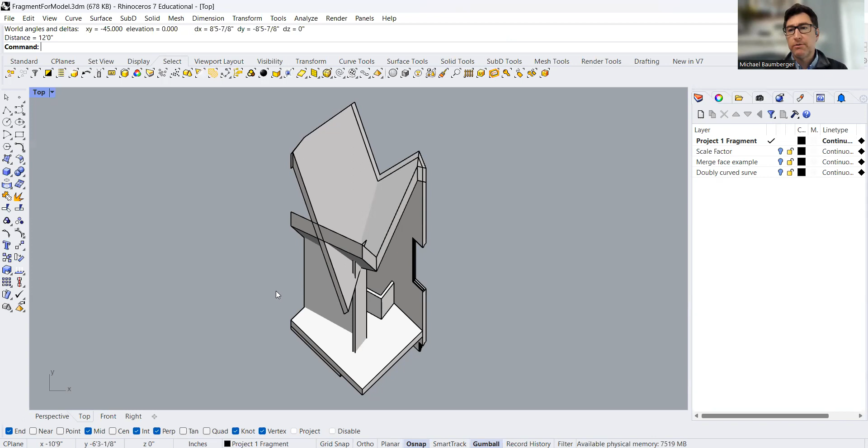Once you have your fragment, you do need to scale this. It's a scale model, right? At half inch equals a foot. To scale specifically to half inch, you want to use the scale command and enter a particular scale factor. For half inch, that scale factor would be 1/24. It's always a factor of 12. So a quarter inch scale is 4 times 12, so it would be 1/48. An 1/8 inch scale would be 1/96, so on and so forth. So for half inch, we'll use a scale factor of 1/24.

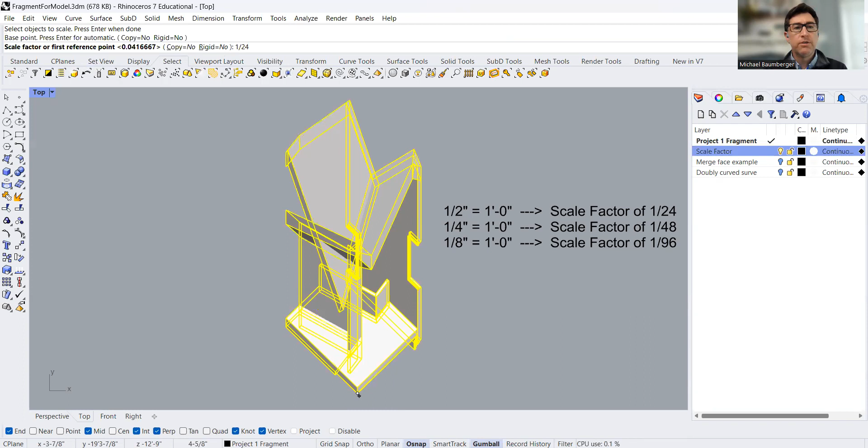So I've already started the scale command. It says select objects, which I have. I hit enter. It's asking for a base point, so I'll just select the corner of the part. And then it's asking for a scale factor or reference point. The scale factor is 1/24. And actually, yeah, there we go. Okay, it's scaled it way down.

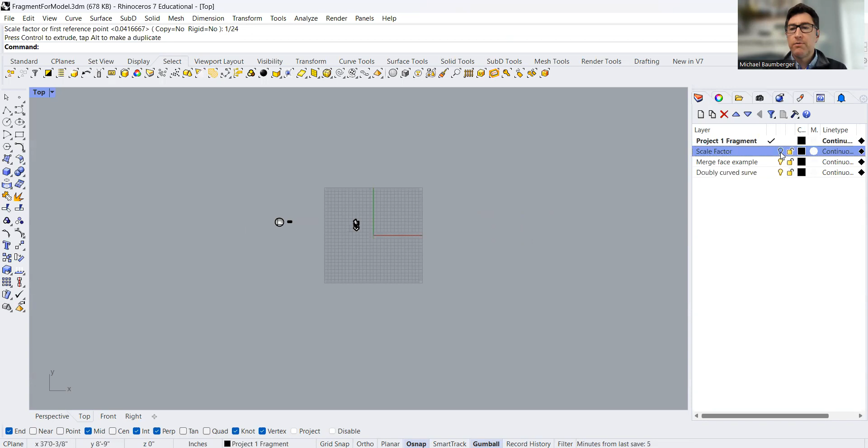I have two other items that I will go ahead and scale as well, so they're all working the same place, and we can move those over there. Okay, so now we have something that is the scale of the model. So now if we get a dimension of this edge, instead of 12 feet, it is 6 inches. So that's perfect.

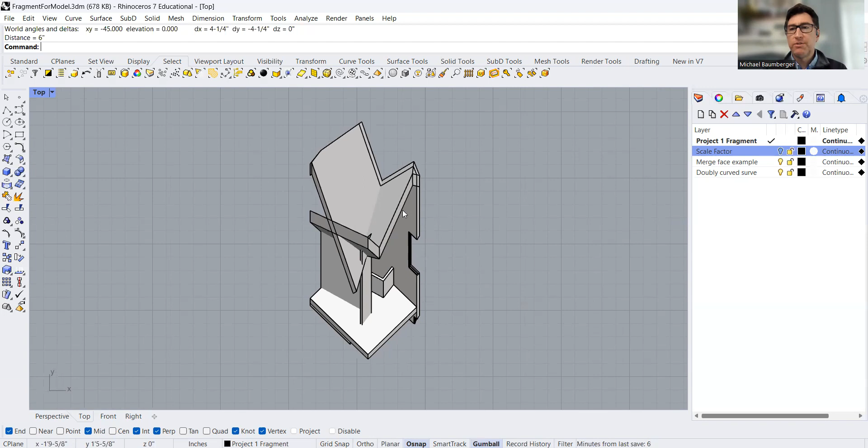Next step is to identify elements or parts within the fragment that you can manageably unroll or otherwise build. In most cases, you won't simply be able to unroll the entire thing in one fell swoop. So in this case, I will grab a small little wall piece over here and extract that from the larger part to start with.

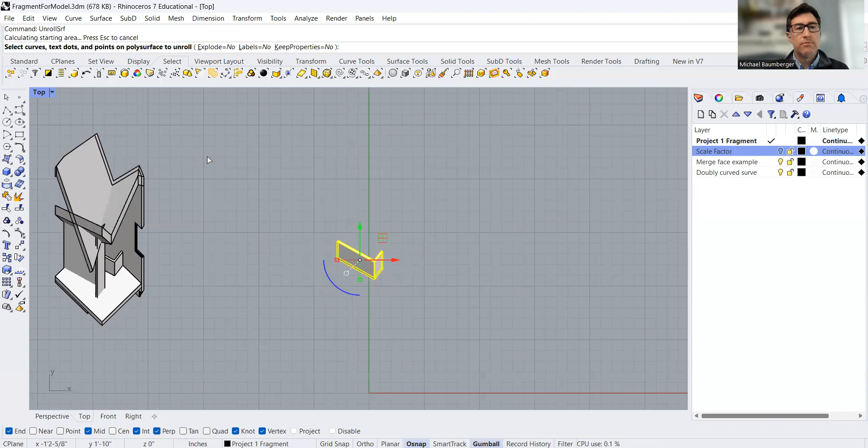And the first thing I'm going to do is just unroll, okay? So using the unroll surface command, select curves, text dots, and points on polysurface to unroll. I'm not going to do that. I do want to draw attention, though, to the first variable, which is explode. Make sure that that's set to no.

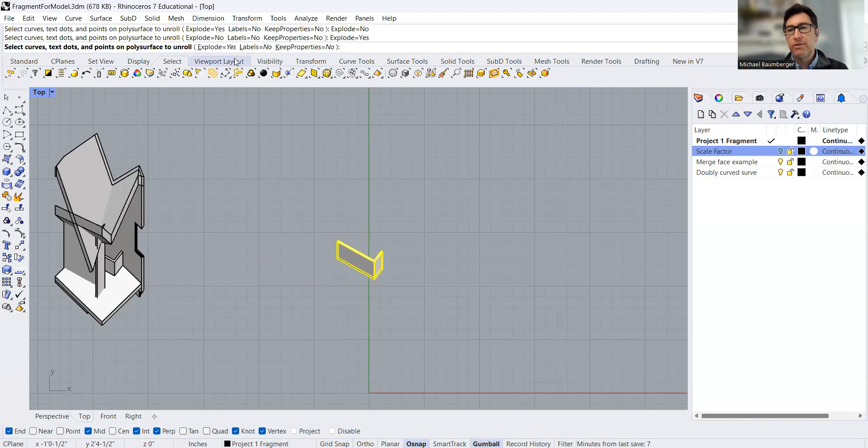Normally, you don't want to explode the unroll. And I'm sure those of you that have started to work with unroll have found that you end up with hundreds of parts. So if I set this to yes and explode, it will do something like this. It's nice and tidy, it unrolls it in a line, but nothing's connected. And it would be maddening in some cases, in a lot of cases it would be more difficult to kind of key each of these back together.

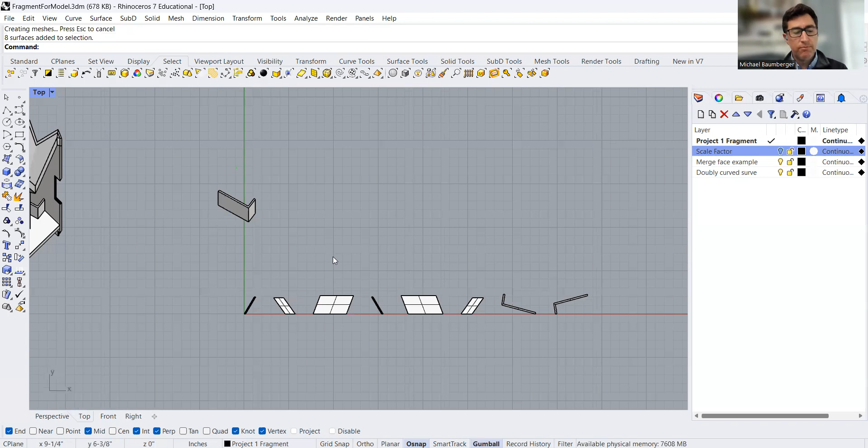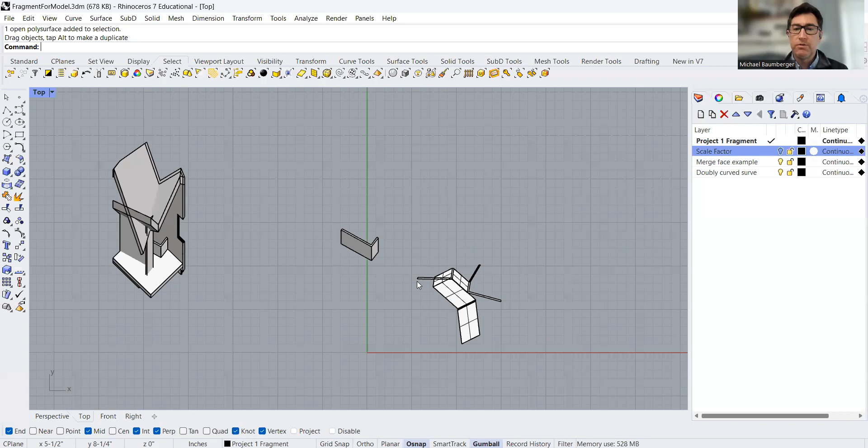Not always, but I would recommend trying to keep the unroll as a contiguous piece. So let's get rid of that. We'll go back, and this time we're going to unroll, and we're going to make sure explode is set to no. And then we end up with this. So the good news is it's a tighter piece, and everything is already registered to one edge, so everything kind of knows where it needs to go.

Already we see a problem, though, because there's at least one surface that is overlapping with another. So that makes this an impossible piece to cut out of a flat sheet. So we're going to have to address that.

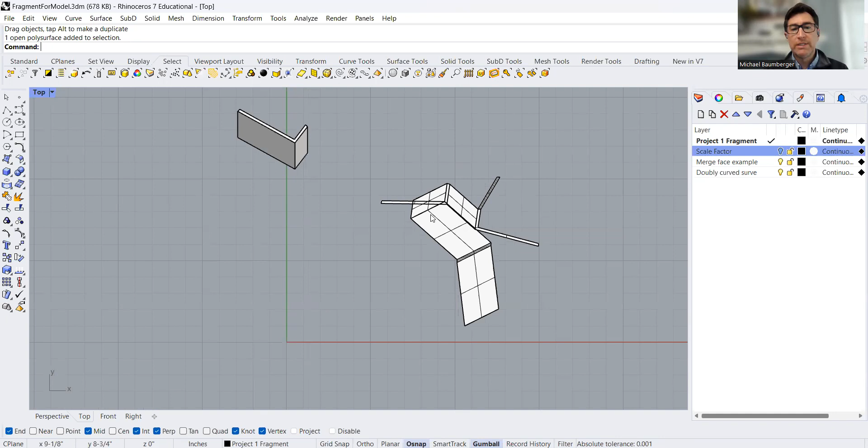Another thing I wanted to point out, one thing that will help you read these more easily is to make sure that the ISO curves are off. So you can just select any part, and then under properties, you can look under ISO curve density and turn off the ISO curves, so then it'll show us just the faces.

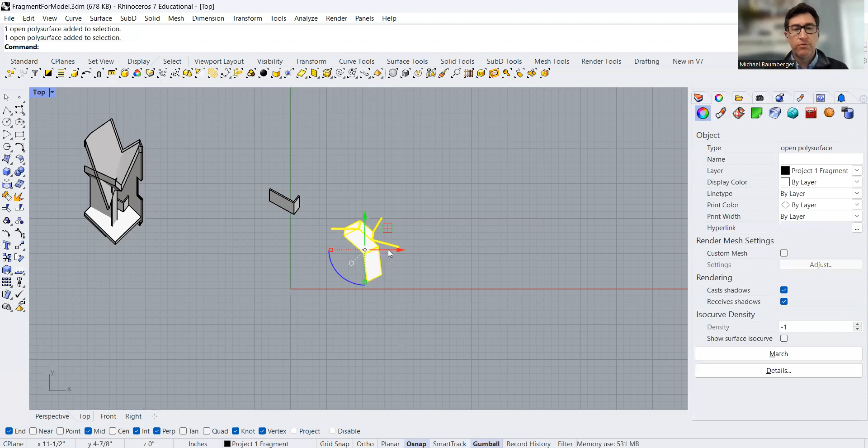But regardless, this is a problem. So let's just move this over to the side for now. So how do we address this? You have a number of options.

You could remove surfaces that maybe won't be visible in the model, remove surfaces that you don't need, right? Even though they're part of the geometry, they may not need to exist in the physical model. They may make more sense to be cut separately.

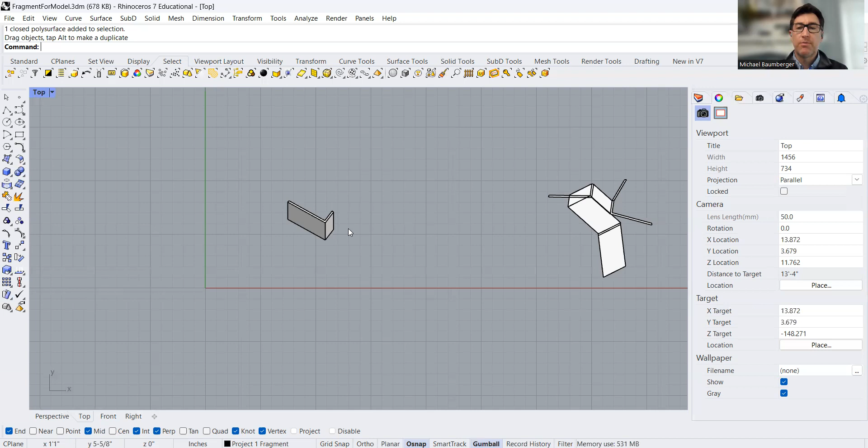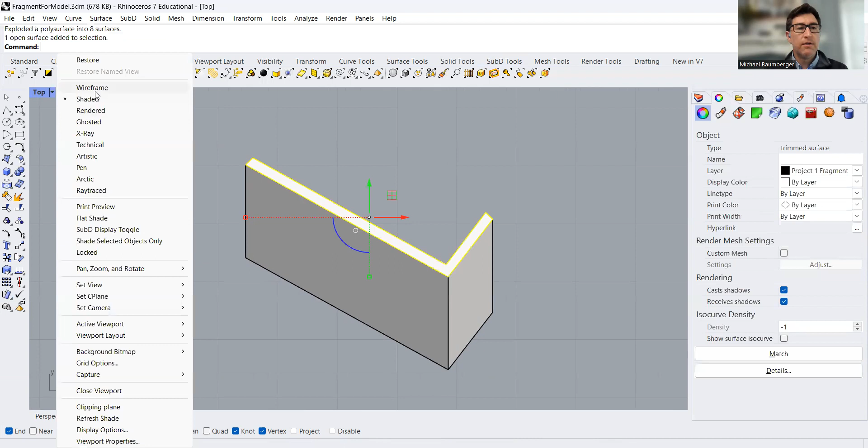So in the case of this, one way to get around this is to explode the part, right? So first thing I'm going to do is explode, and then I am going to select the top surface and the bottom surface. I'm just going to turn on wireframe to get a better view of that, and I'll move them out of the way. Okay, I'll turn shaded back on.

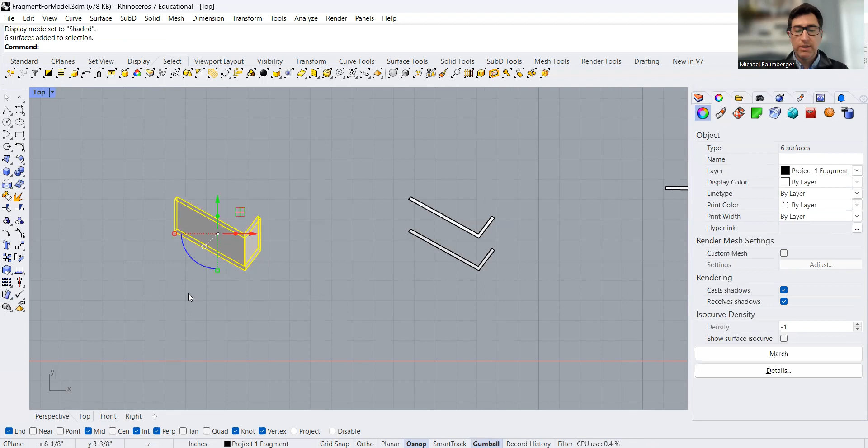So we can address these separately. Now we have, in some ways, a more straightforward geometry. I'll reselect it and type join. So now they're joined together.

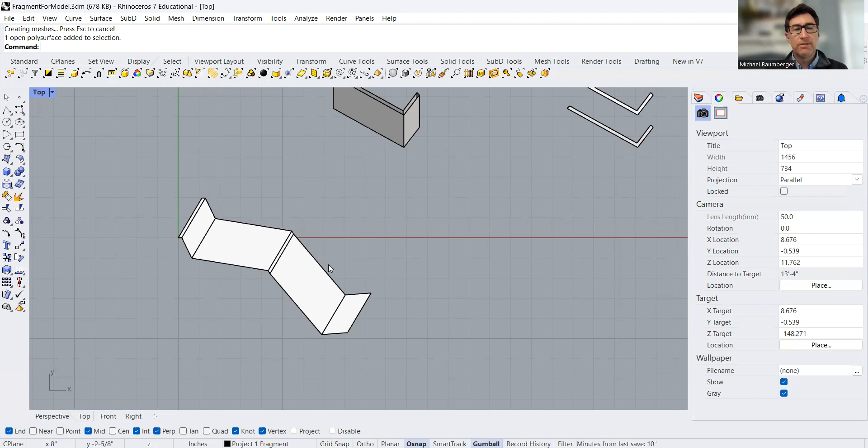Now, when I go to unroll this surface, I end up with something that is much more manageable. In fact, it is possible, right? I can actually lay this out in a way that it could be cut and reassembled.

And these, you know, aside from not being in the correct orientation, these are pretty easily cut as is. In fact, if this is a plan oblique, they are actually already oriented parallel to the XY plane. So you could just move those to 0 and cut those as well. Then you have your piece.

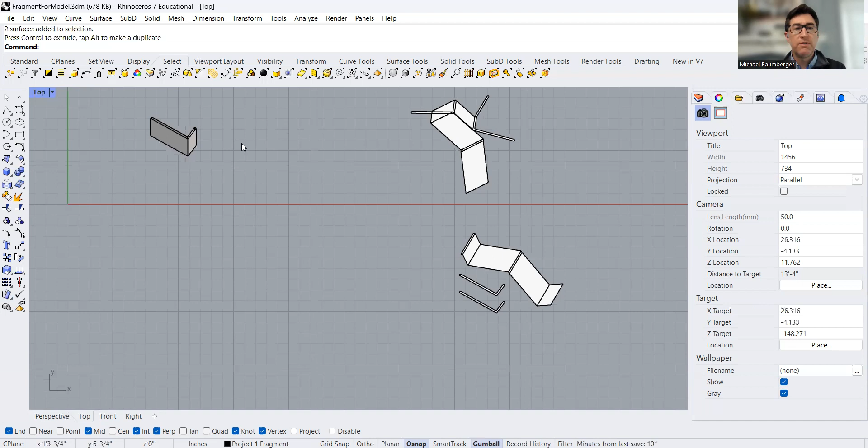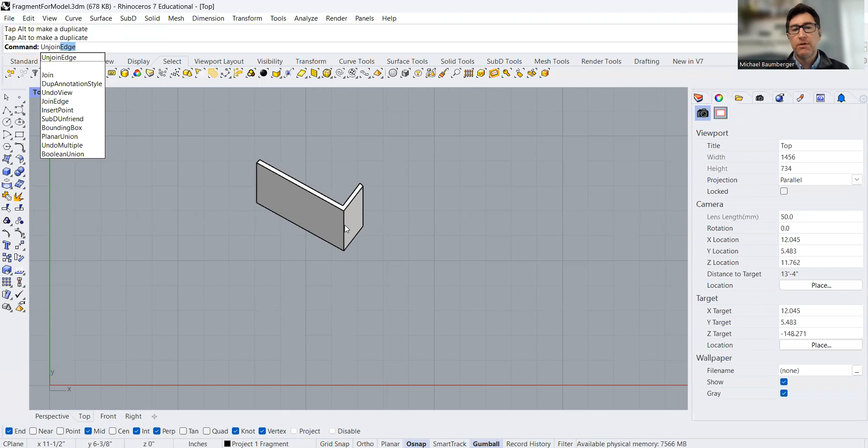Yet another option is a little more involved. Let me grab another copy of the piece. This is an interesting tool called unjoin edge. In this case, we're going to be selective about which edges don't stay attached during the unroll, allowing you to customize to a certain extent how the piece unrolls. You do this simply by running the command and selecting the edges that you don't want connected.

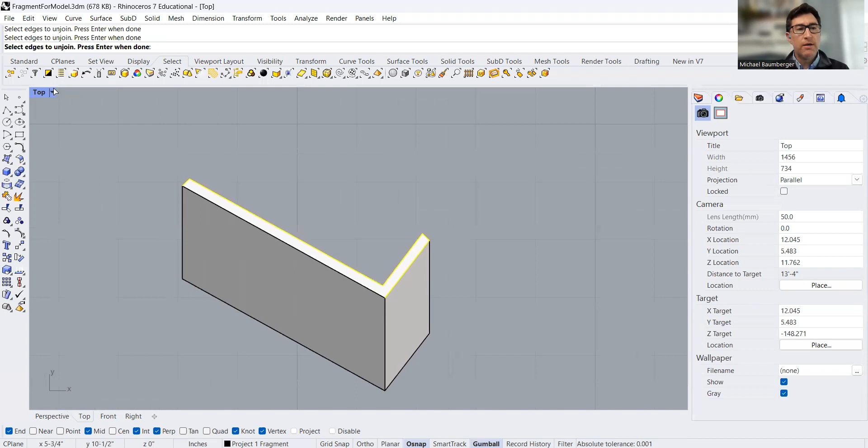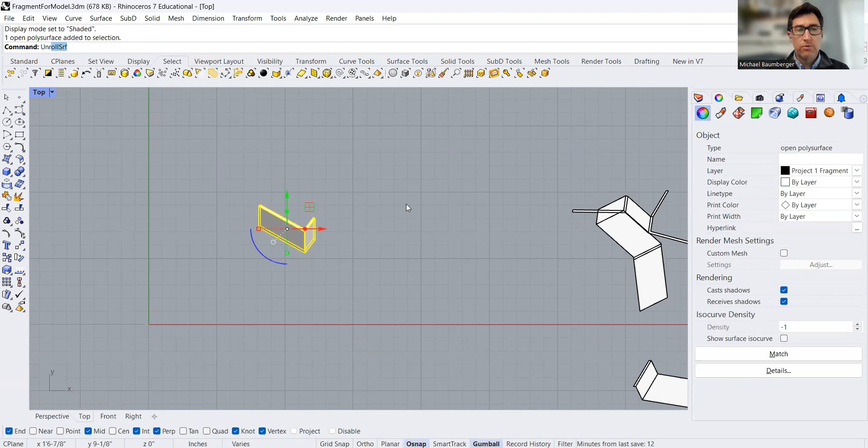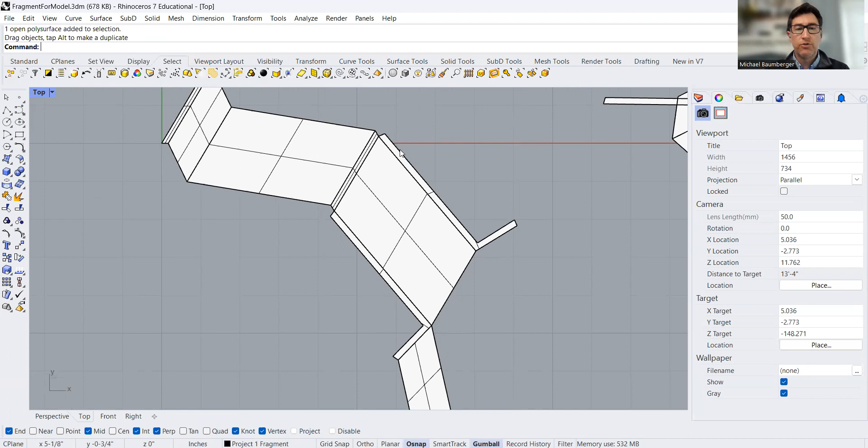One way to do this is to select all but one edge of the top face. We can set this to wireframe and do the same for the series of edges on the bottom surface. You can't see anything different, but when we move back to our unroll command, we get a different result. Compare it to what we had before, which was a mess. I detached the edges on all but one edge of the top and bottom face so that I had control over where that unroll happened. Manageable on the left, not so manageable on the right.

So again, that command is UnjoinEdge, and I think that'll be a useful tool for you guys to use in working through this.

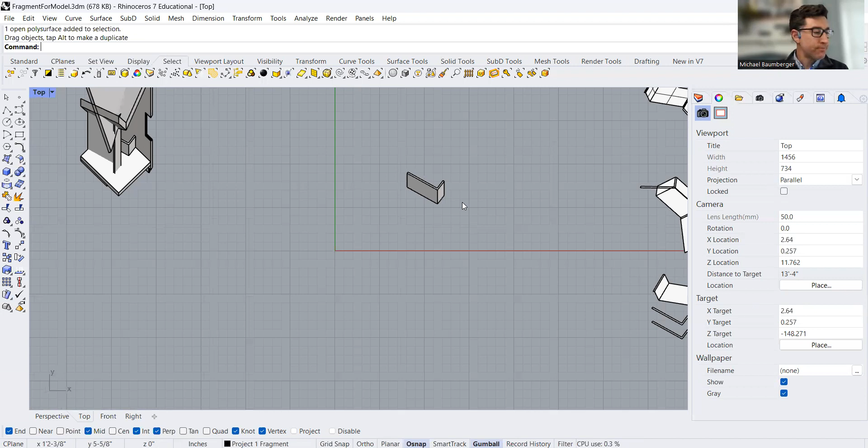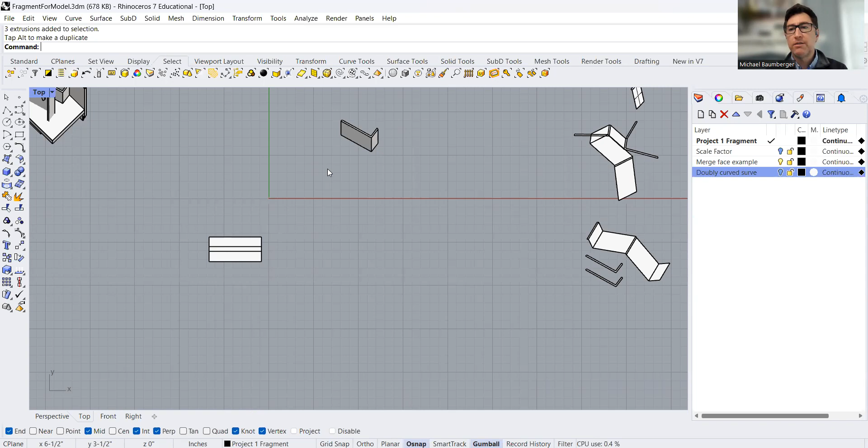Another thing that came up in some questions I've had already is situations where, when you were modeling your fragment, you maybe didn't have physically modeling it in mind, so there were objects stacked against objects, stacked against objects. Let's look at this as an example, kind of a stair element perhaps.

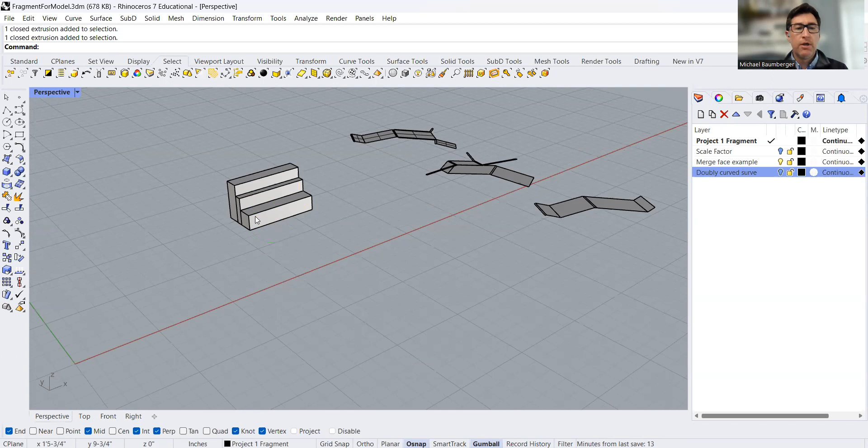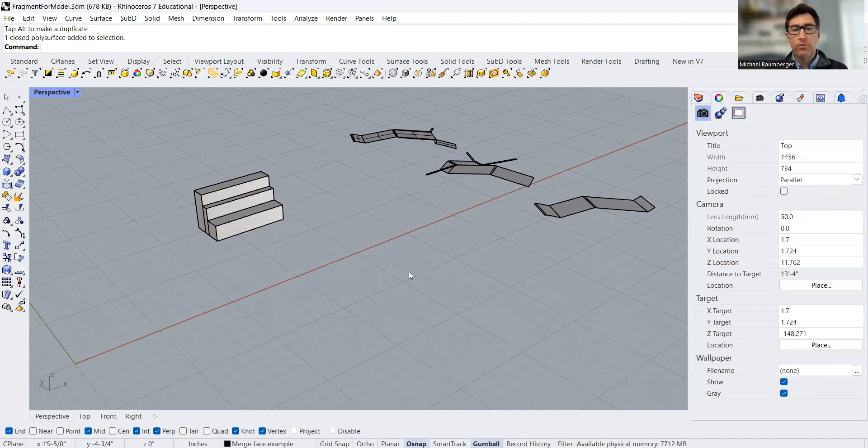Now this is actually three different objects currently, and of course you could unroll them individually, but it often makes sense to join them together. In this case, because they're all solids, I will use the Boolean union command. Now they are one, simple enough. However, when we go to unroll, we end up with this kind of piece, and it's sort of hard to follow what's going on.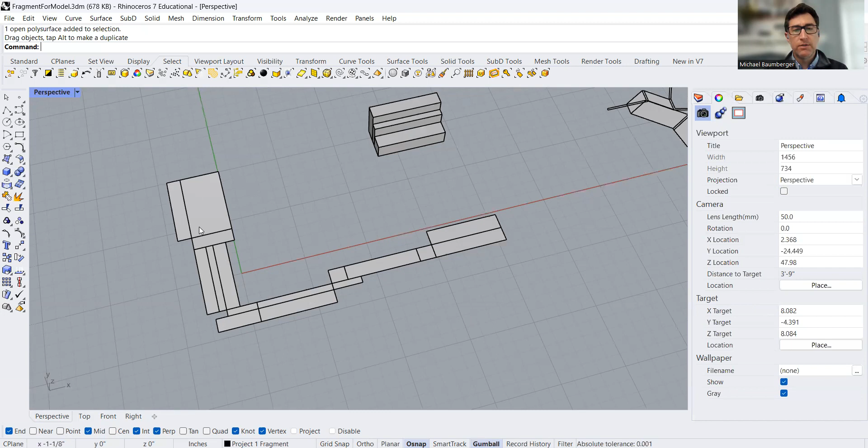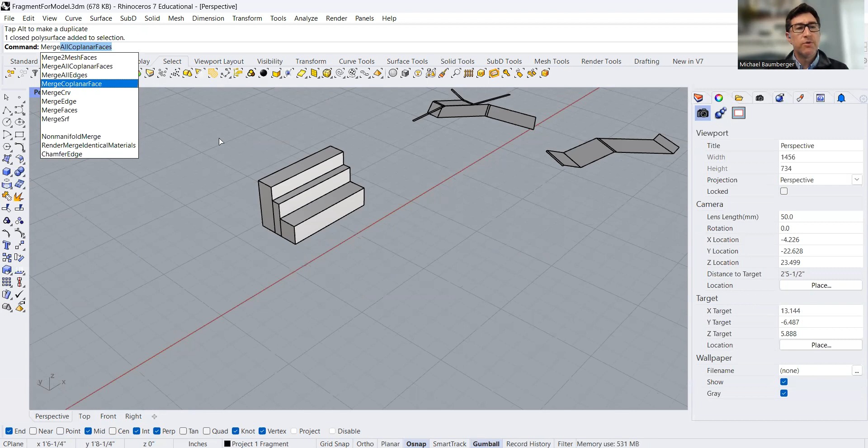In fact, it treats each individual face as a surface, so it gets a little confused. What I would recommend is using a tool called merge coplanar faces. There's merge all, and there's just merge coplanar face. If we select merge coplanar face, I can select a face and an adjacent face that is in the same plane, and it will merge them.

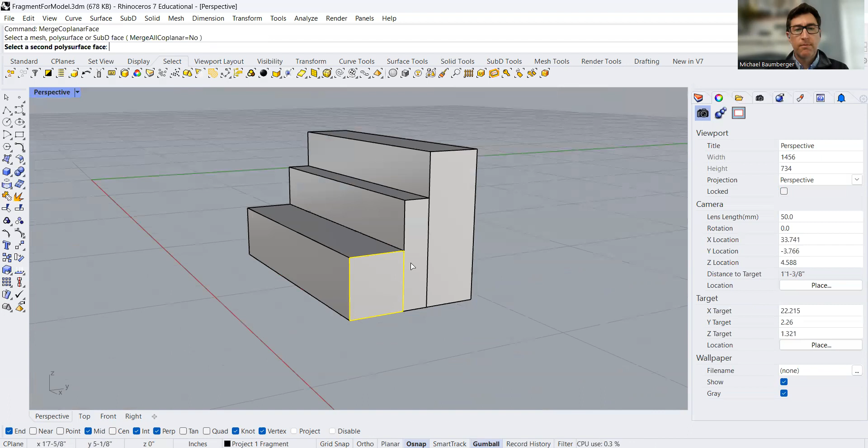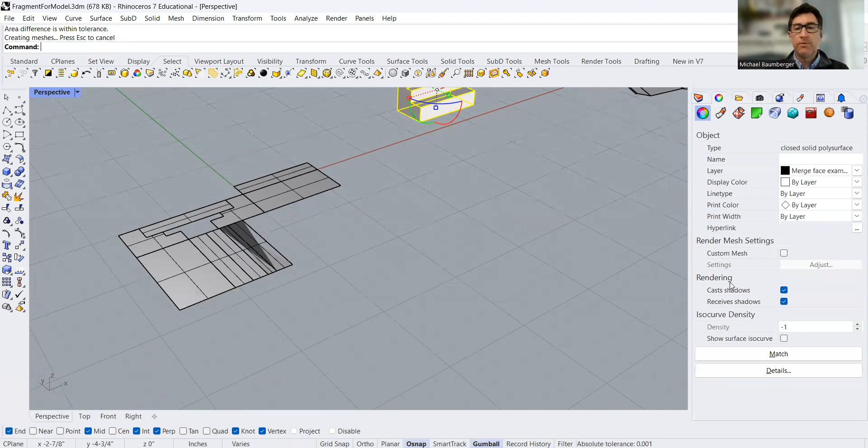And you can continue to do that, just keep going around. Now suddenly this is a much cleaner model, certainly a cleaner model to unroll. So now, again, we go back to unroll, and we end up with something like this when I turn off the iso curves. In particular, you can see the profile of that stair piece.

So another useful tool when you're working on moving your existing models to a place where they're more easily unrolled, more easily built.

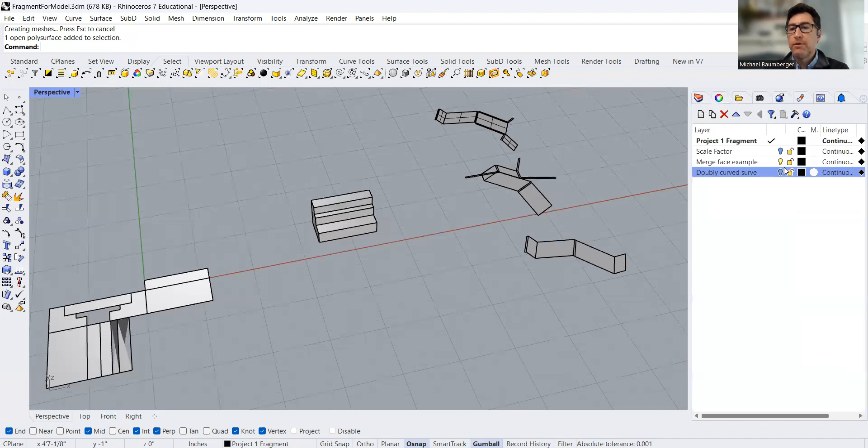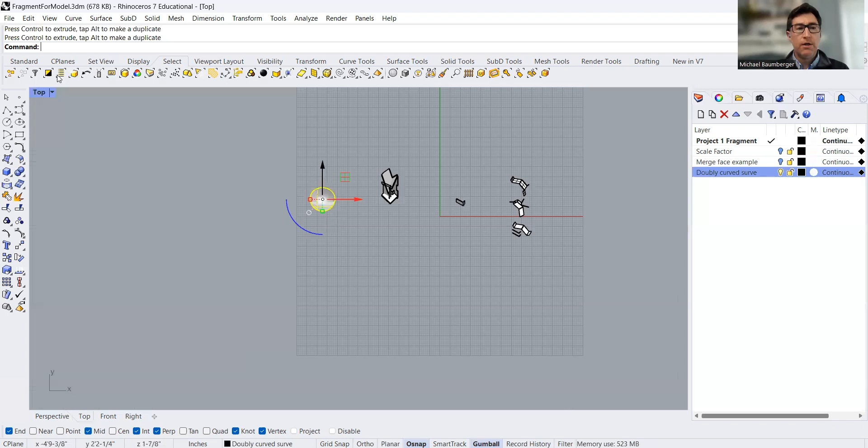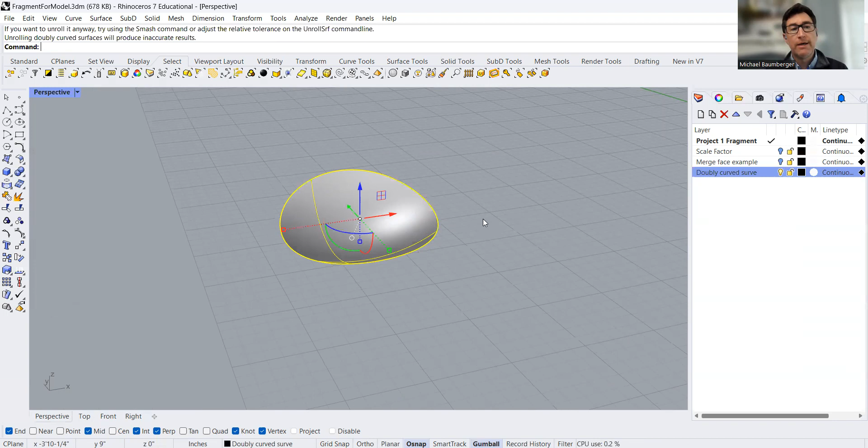So let's go ahead and unroll it. If you try to unroll a doubly curved surface, it will give you a message saying it will produce inaccurate results. It refuses to even try, because it would effectively have to stretch the surface. So how do we get around this?

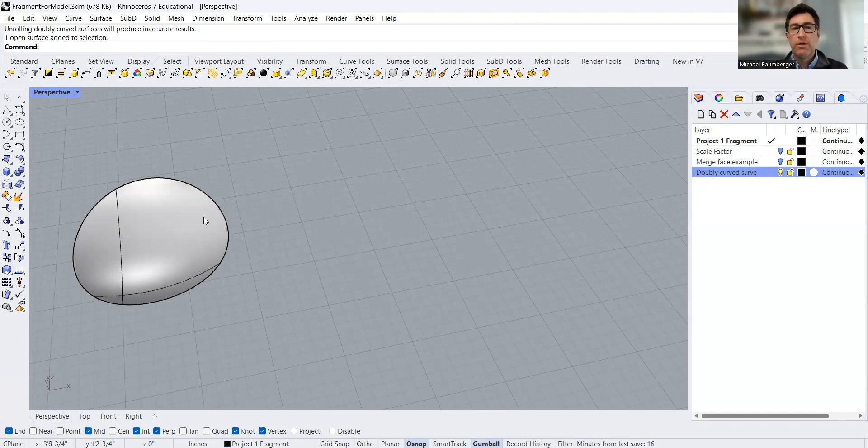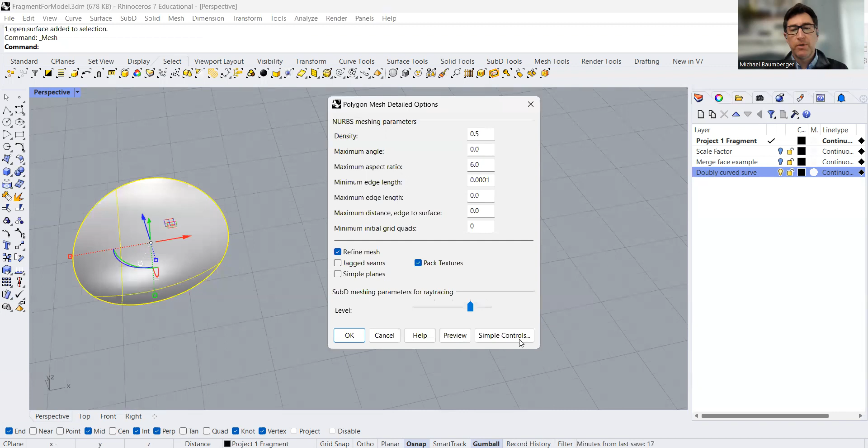Well, the first step would be to take the surface and actually convert it into a mesh. Often with Rhino we work with surfaces, but in this case we're going to have to convert it into a different type of geometry. If I go up to the mesh dropdown, we can say create a mesh from a NURBS object. You can look at the detailed controls, or we can simply use more or less polygons. I want to do as few as possible to start with, and then I'll click preview to see what I'm getting, and that's what I get.

Okay, let's try that. I'm going to slide the original NURBS surface out of the way, and we're left with the mesh. The big difference is the mesh is made up of a series of faces, either triangles or quads, four-sided edges or four-sided faces that are planar. Those individual four-sided faces are not curved in any way, each of them is flat. So this is a really good type of geometry to work with if you're moving into fabrication, especially full-scale fabrication.

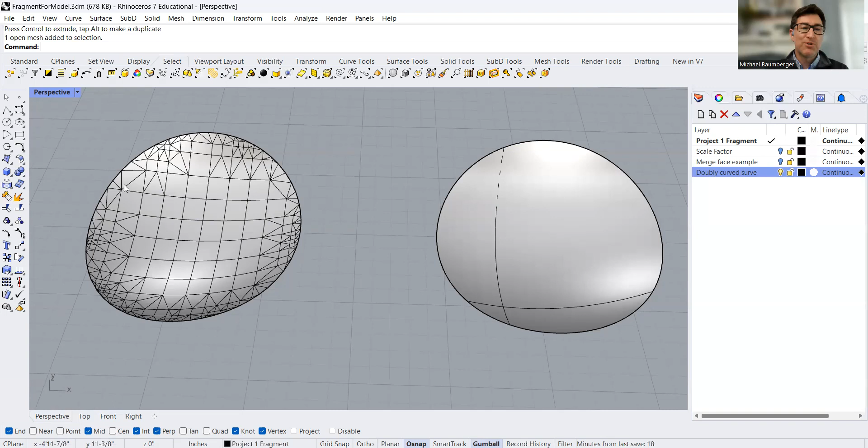However, these are pretty small, and there's a lot of them. So what we can do is use a tool called Reduce Mesh, and it will allow us to set a percentage or set a number of faces. The current number of faces in this object is 439. We can tell it to reduce the number of faces to any number, or give it a percentage. Let's say we want to reduce the number of faces by 90%.

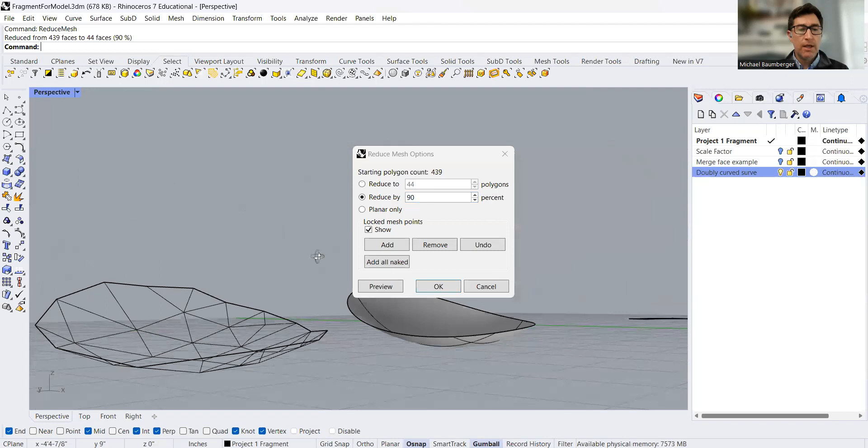And if we preview that, we get this. There's a trade-off because you lose information, but it also becomes much more manageable to actually cut and put back together. So instead of doing 90%, maybe we go 80%. So you see, there's always a trade-off.

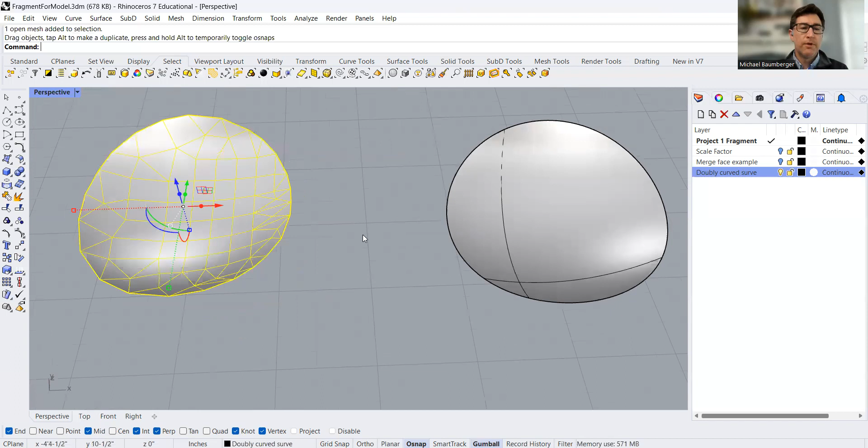I'm actually... we'll just keep it at 90 for now. Yeah, let's do that. Okay, so this seems manageable. We have a reasonable number of surfaces. The one thing you have to keep in mind, though, is right now it's still a mesh.

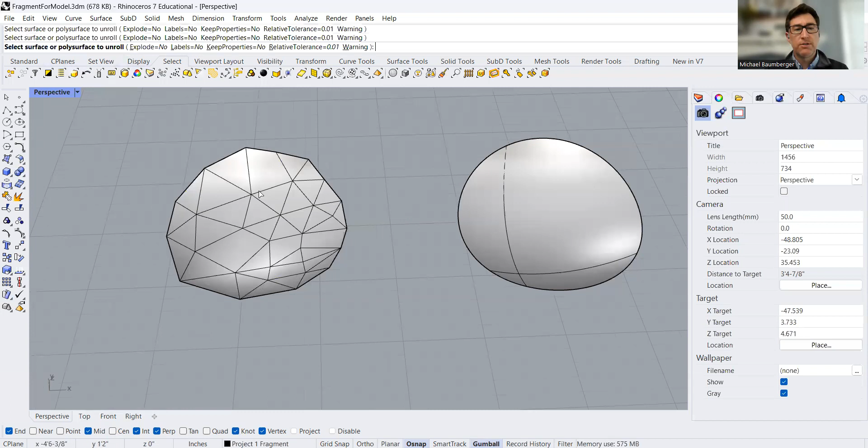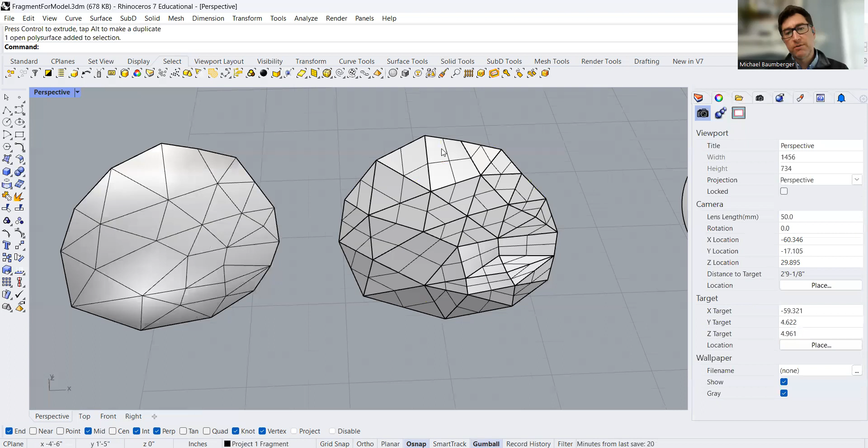And Unroll Surface needs a surface, it won't work. So the last step is to convert the mesh back to NURBS. Fortunately, there's a command called Mesh to NURB. So you type that in, and immediately it will convert each of those faces that on the left-hand side were meshes to surfaces. You see it gives you the ISO curve view, so we can turn that off. They look similar, in fact identical, except the one on the right, the NURBS, can be unrolled.

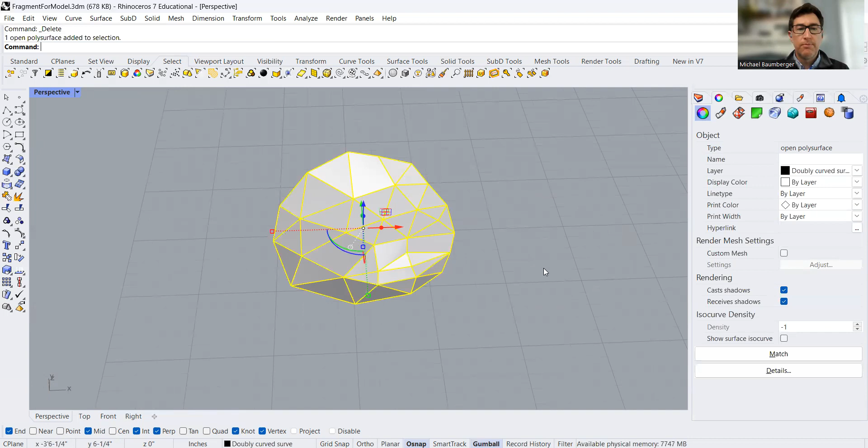So I'll get rid of these two, and we'll just take our newly created doubly curved surface, and let's try unrolling that. And there we go. So in this case, yeah, there's a challenge with an overlap. In fact, you probably could take this and explode it into a few different pieces manually. It's simple enough that you could do that.

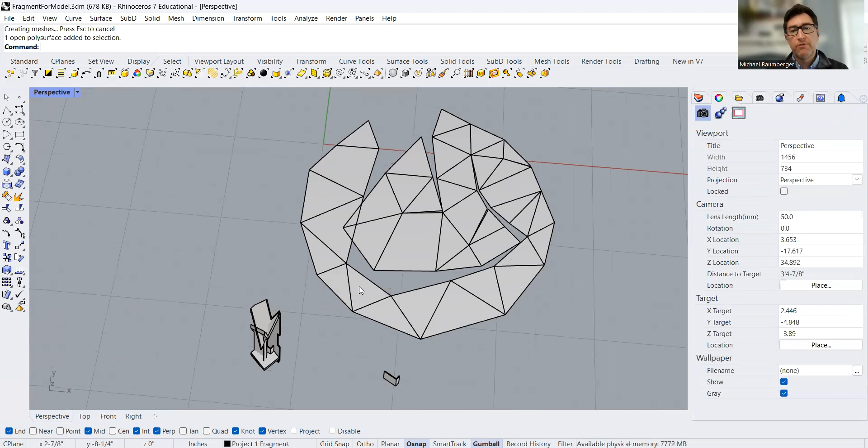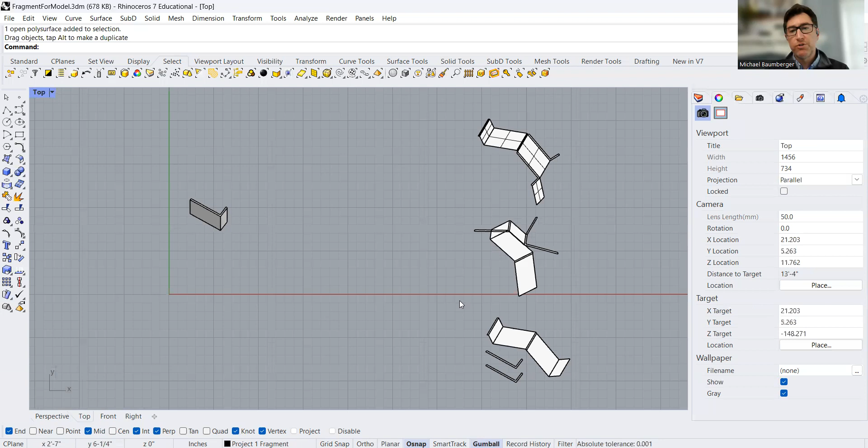So let's go back to our original sample part here. We had 3 different versions of this unrolled. I'll just pick one. Once you have that, where do you go from there? I think you probably already know that you go into Make 2D. There are no hidden lines, so we don't have to worry about that.

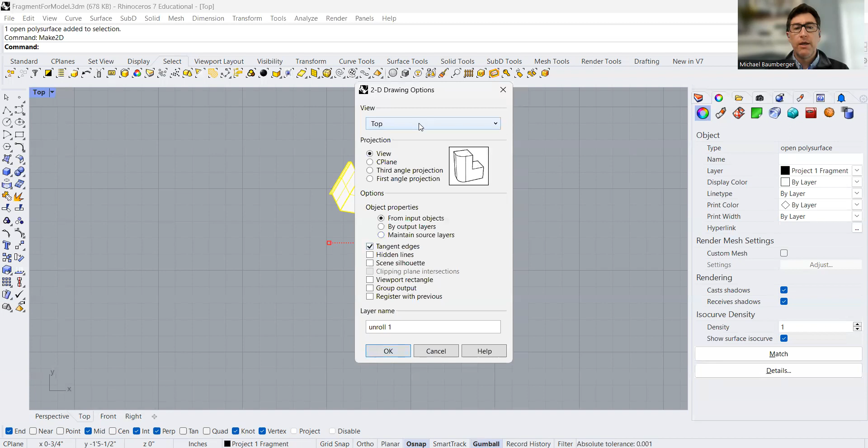We do want to show the tangent edges to make sure we show the fold lines. And it doesn't matter whether you group, I'm going to be ungrouping it, so I won't group it. Let's go ahead and see what that gives us. There we go.

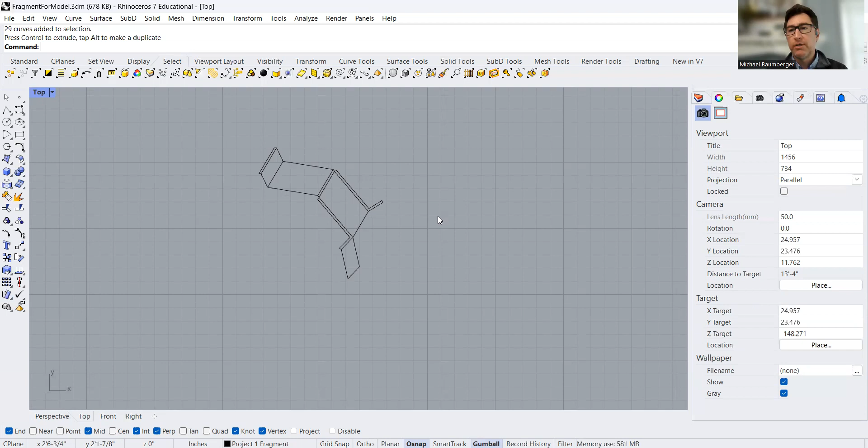So from here, it may depend on which direction you're going. If you're going to print this on a laser printer and use that as a template to cut something out by hand, or whether you're going to use a digital cutting tool like the laser cutter. To start with, let's figure out, say we're going to lay this out on 11 by 17. Let's see if it even lays out on an 11 by 17 sheet. So there's the sheet.

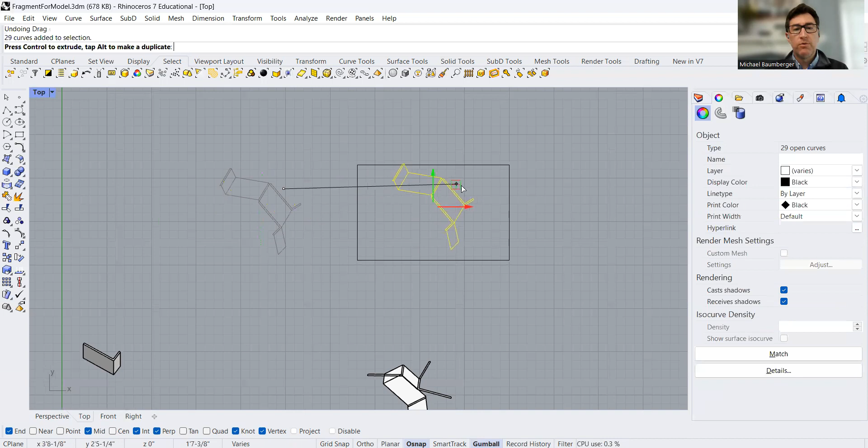And we'll move this over, and conveniently it does. We could pack this tighter, but let's just say that looks good. This is a pretty straightforward part, so it wouldn't be too difficult to infer where the folds are, where the edges are. It's always nice, though,

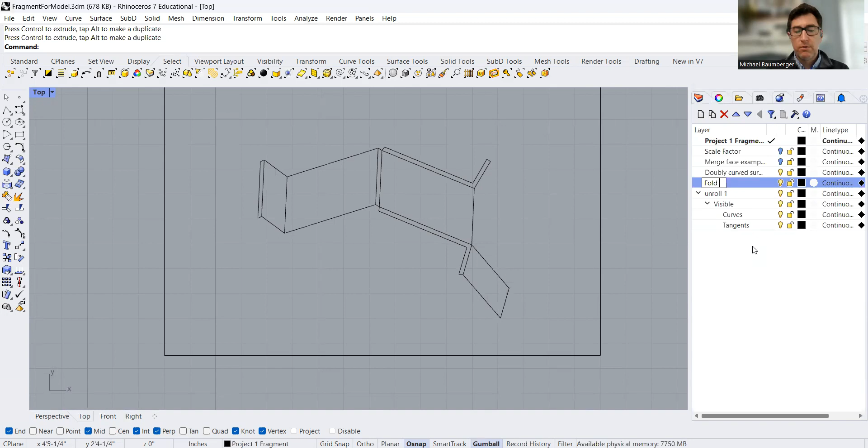if you also include some fold lines or specify the fold lines. So I will actually select every edge that is actually a fold and not a cut, and then I'm going to put that on a fold line layer.

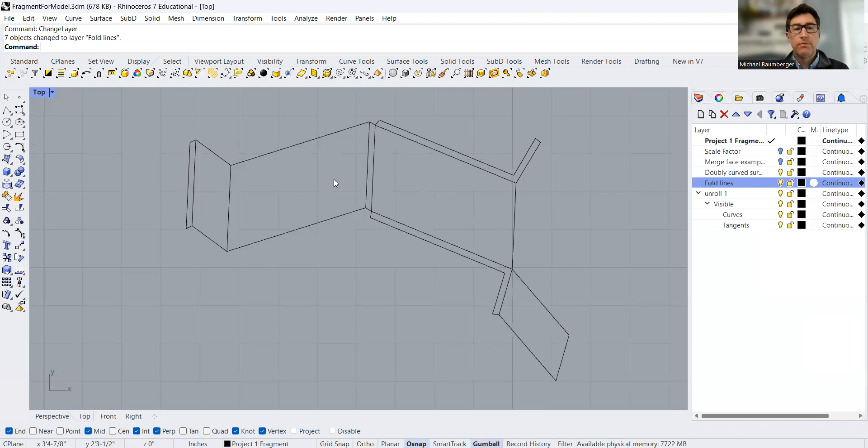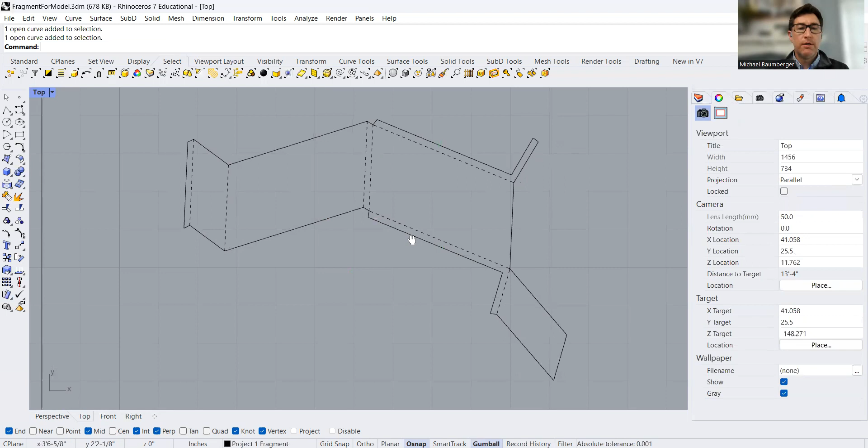And actually what I'll do... let's see... one more time, and I will make sure that my line type is set to hidden. And I can keep the color the same. But now this gives us a really manageable thing that can be printed, and you have your fold lines. It's the beginning of your model kit.

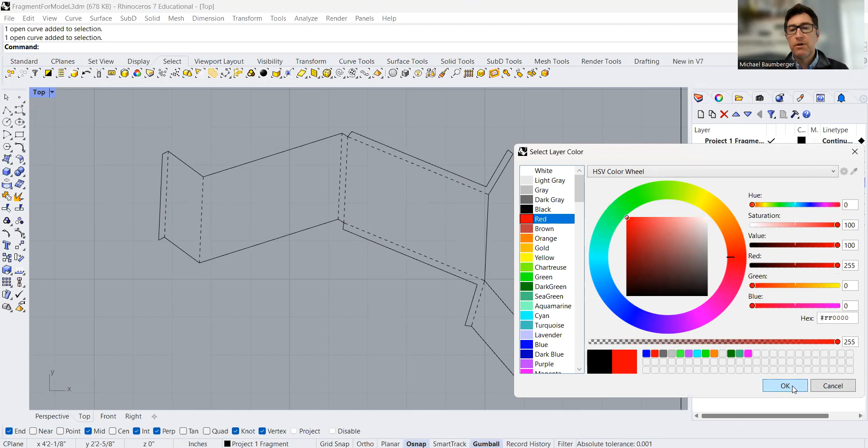If you were going to set this up for the laser cutter, you could do it in a similar manner. You would just want to make sure you use color instead of line type. So if I wanted these interior lines, the fold lines, to be just engraved on the laser cutter, I would set them to red. Of course, they're not, because the display color is overriding the layers. So I just selected everything, and I want my display color to show as by layer.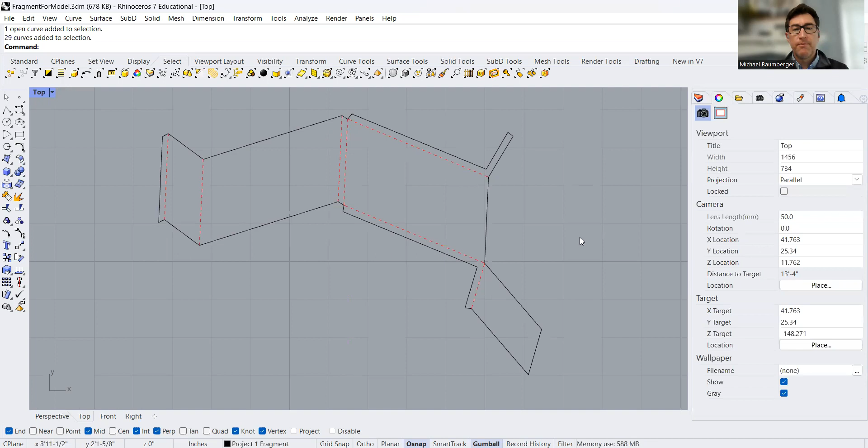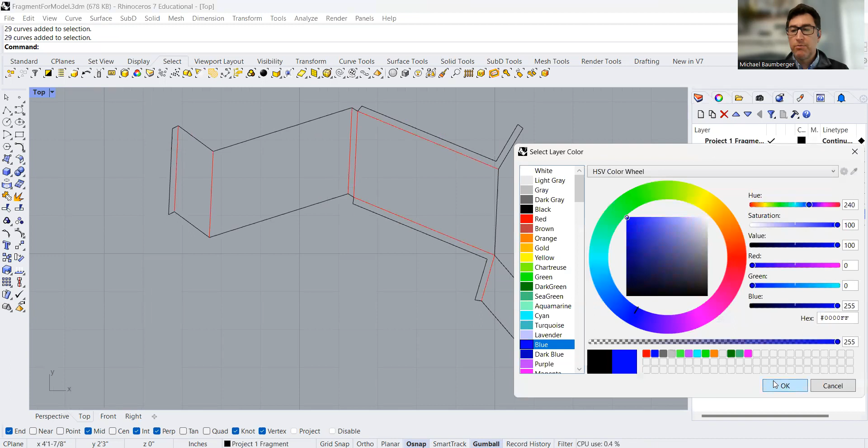There we go. Same thing with the line types, just for this example, I want it to be by layer as well. And the visible curves, I'll set those to blue. So now my blue line could be the cut line and the red line could be the engraved line on the laser cutter. Then you could save this and bring it over to the lab and have at it.

So there you go, just a few tips on getting started with your sheared fragment model at 1/2 inch. Okay, good luck, everybody.